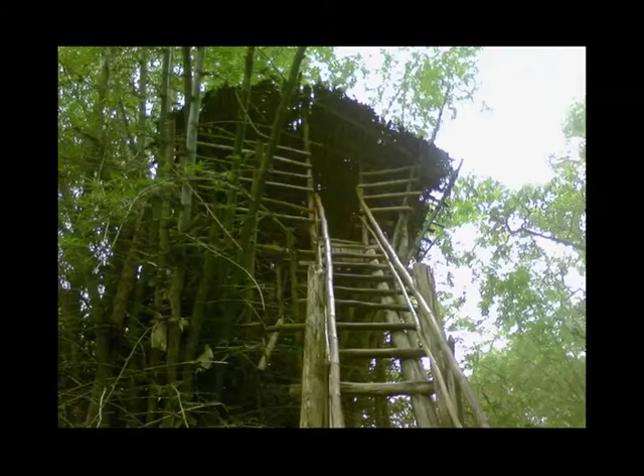I'll start with the question: which of these buildings are the greenest? I've got a series of huts, all made with very local materials, using very little energy because generally they have very little heating, if any. They've been made with local staff, so I think they're relatively green buildings. Then I've got a series of buildings designed by my boss. These are skyscrapers, bioclimatic buildings, very well shaded, very well lit, and they use little energy.

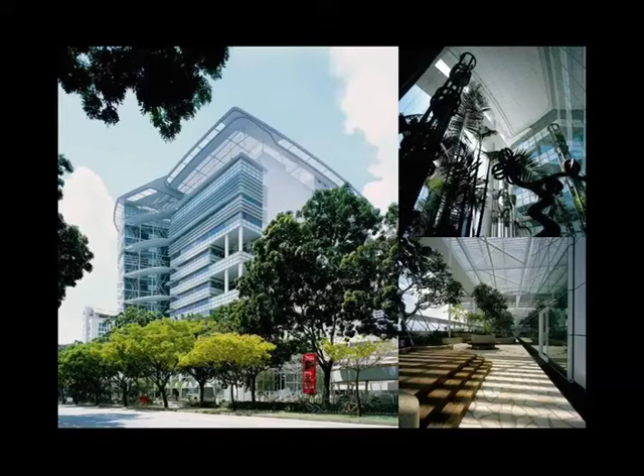So does anyone know which one of these buildings is the greenest? No? Well, it's the huts. And the reason why it's the huts is, well, partly, of course, they use very little materials. It's only local materials, but also there's very little heating, ventilation, and air conditioning in them.

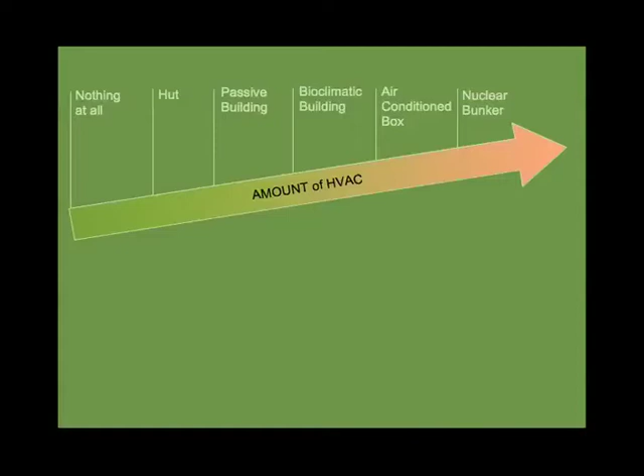So if you go from this scale, from the left to the right-hand side, on the left you've got nothing at all. So imagine maybe in Thailand on the beach and there's no building. Then we've got the hut through the passive building. The passive building doesn't have any heating or cooling.

The bioclimatic building, which I believe is the next step, is a building which is air-conditioned and which has heating and ventilation, but which is made in a way which is going to reduce its own energy use. The next step is the air-conditioned box, which a lot of buildings in Dubai currently are being built like. And finally, we have the nuclear bunker, which has probably the most amount of heating, air conditioning that you can ever imagine.

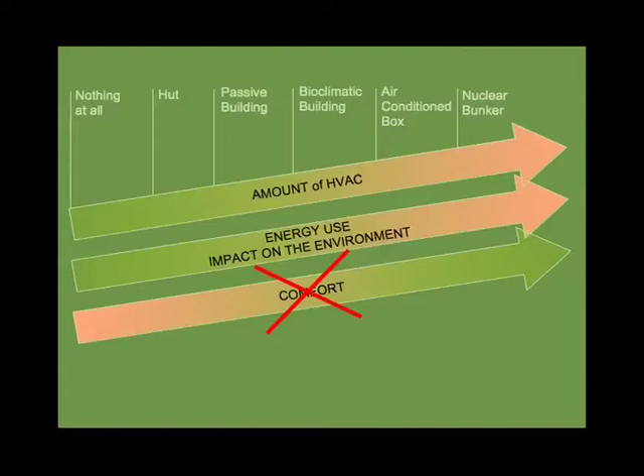So the more you go towards the right, the more energy use you get. But one could say, well, if you get more energy use and better ventilation, etc., then it should be more comfortable. We think that's not the case, because if you're in a bunker or in a glass box, then you're probably not so comfortable. We think that actually the best comfort zone is the area where you have a sort of relationship with the outside, and is a building which actually reacts with the outside.

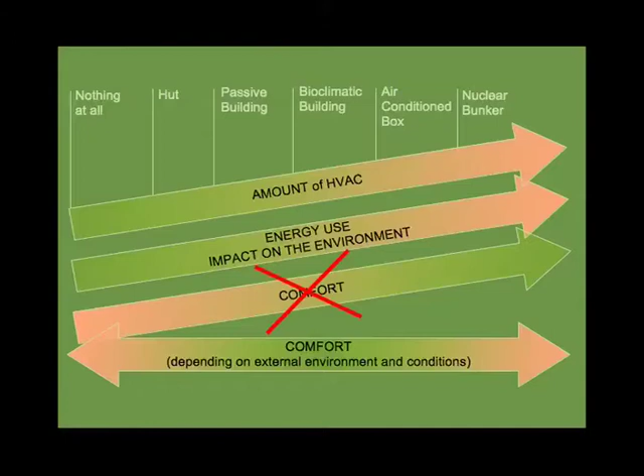So I think we're not only talking about energy saving once designing a bioclimatic building, we're also talking about buildings which are comfortable, which are healthy, and good for the occupants, therefore more valuable. So now we're going to go through the principles of bioclimatic design, and then Maria is going to present on this.

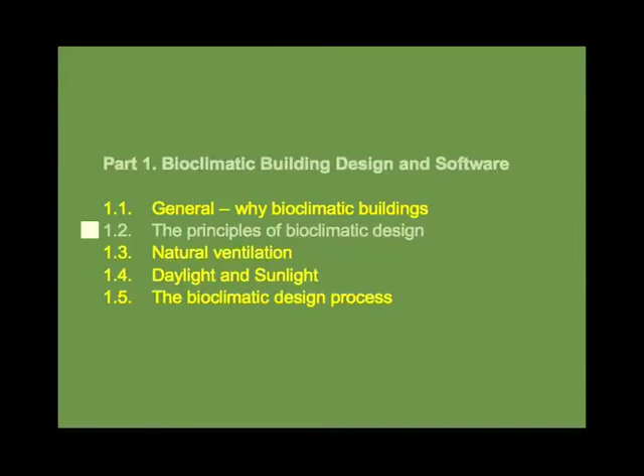One of the things that the presentation begins with is the definition of bioclimatic design. You will allow me to sit, please. Right.

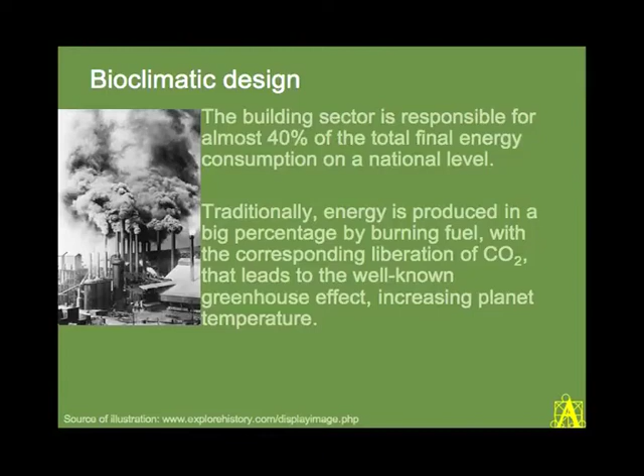What is a bioclimatic building? And why do we deal with them? One of the reasons is that the building sector is responsible for almost 40% of the total energy consumption on a national level. And energy is produced by burning fuel, and you can see the image, which is rather horrid. The corresponding liberation of CO2 leads to the greenhouse effect.

We begin with two definitions of bioclimatic architecture. It is a way of designing buildings and manipulating the environment within buildings by working with natural forces around the building, using them, actually. That's from the Manchester School of Architecture. Architecture that designs to take advantage of climate and environmental conditions is another definition that I really liked. And what is very interesting in mostly all building-concerned technologies and systems is that we don't really discover them now.

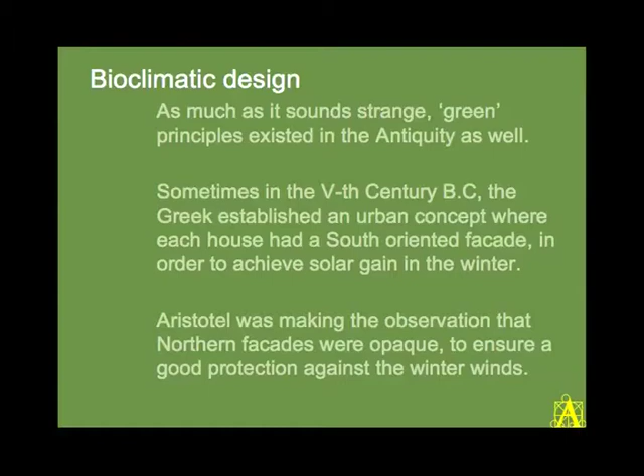But actually, we rediscover them now because in antiquity they were existing. The Greeks had their houses oriented towards south. Socrates lived in a solar house. Aeschylus said that you have to be stupid to live underground. Well, actually, we can have a discussion here because underground buildings are very comfortable and very modern today in many respects.

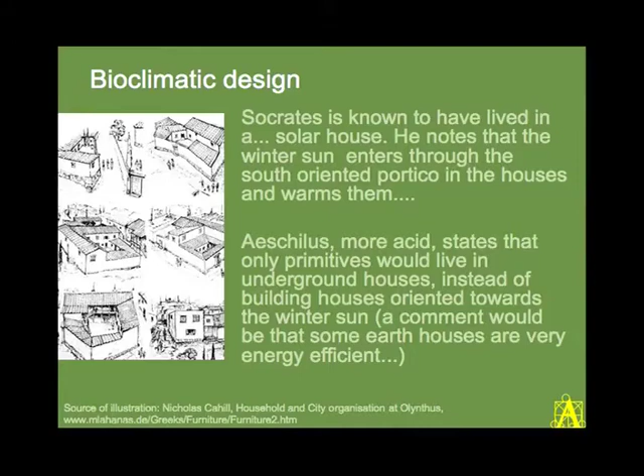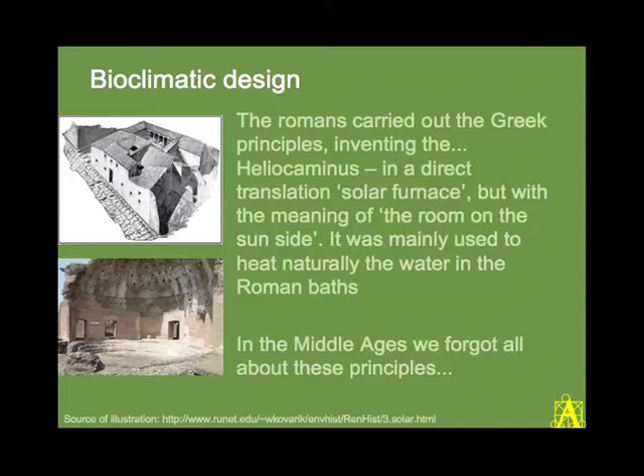Going a little bit further, the Romans carried out the Greek principles with the heliocaminus. The direct translation would be a solar furnace. Actually, they were heating their water for the baths. We forgot about these principles in the Middle Ages and reinvented them in the previous few decades.

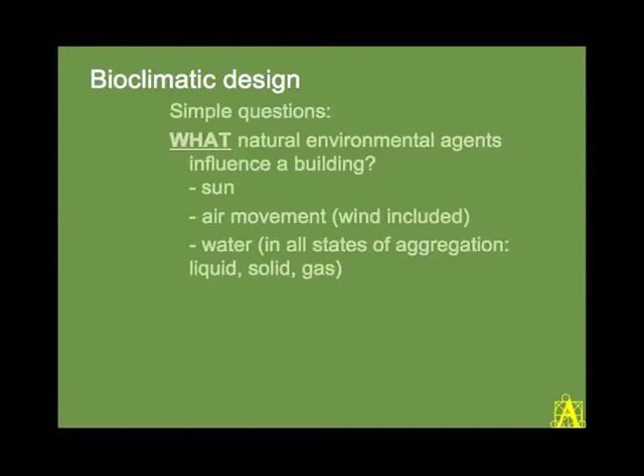So what natural environmental agents influence a building from the bioclimatic point of view, of course? Sun, air movement with the wind, water in all states of aggregation—liquid, solid, and gas. We have to build using them and helping ourselves with the benefits that these environmental agents bring us. Also, vegetation, plants and animals help us.

So you have all these presentations within your folders, so I can gallop through the presentations because it's a very dense day. Sun, air movement, water, and biological agents, I said, with their advantages and disadvantages: health, hygiene, natural ventilation, which again means health, natural cooling, which again means health.

Health brought to us from the plants, and in all the first three situations, we help ourselves to the natural energy that can be produced by using these agents.

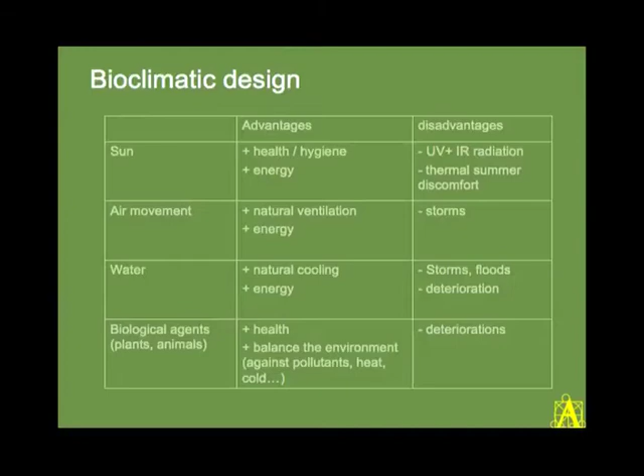And of course, the disadvantages, because we have thermal discomfort, storms, floods, and deteriorations in all cases of misuse of these agents. So sun, air, movement, currents and winds, water, landscape, vegetation all determine the location, the orientation, and the geometry of the building. The building's position, orientation, and geometry should be determined by these agents, using them for us and not against us.

Architecture has an influence over the energetic performance of the building. The geometry of the building and of the envelope, and the building materials and structures, determine the thermal behavior of the building.

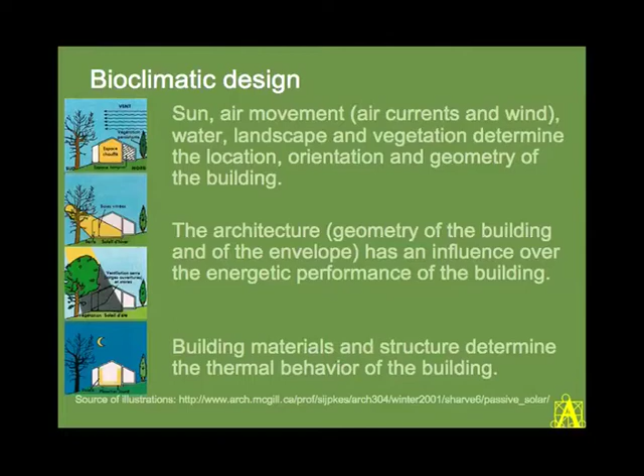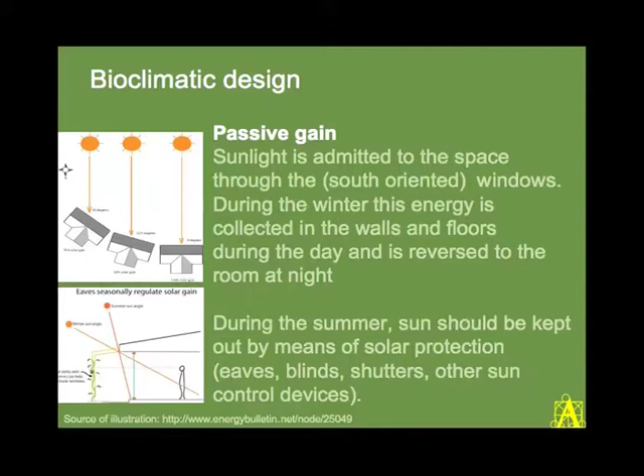During the summer, sun should be kept out by means of solar protection, and in a very, very simple way, by just drawing the two rays that represent the winter sun angle and the summer sun angle, you can actually design in a most simple way the solar protection for the summer dimension and the possibility of entering the sun during the winter.

And of course, I couldn't resist the temptation of showing that vernacular architecture, and from there civilian architecture, Romanian architecture - because we have this workshop here - has always used, and not only Romanian architecture, all vernacular architecture uses principles of bioclimatic design, because they had to build with nature, not against it.

The use of passive systems is the most efficient way of taking advantage of natural resources. Technology uses sunlight to provide renewable energy, and the way the technology works in stages you can find in the slides.

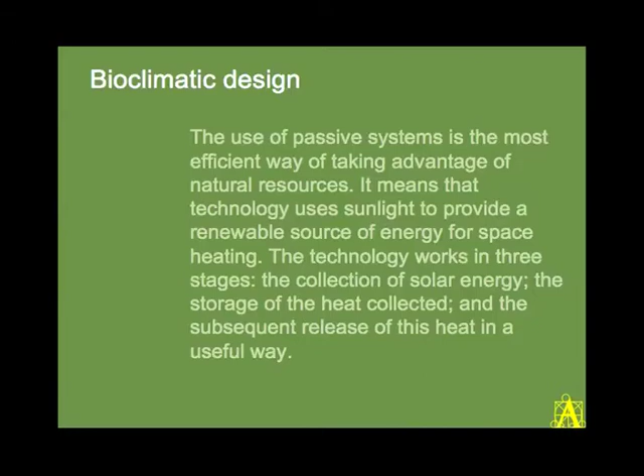Not exactly bioclimatic design, but I did say that we use water power, solar power, and wind power in order to produce power, and we can see them here in the slides in the traditional and in the contemporary way.

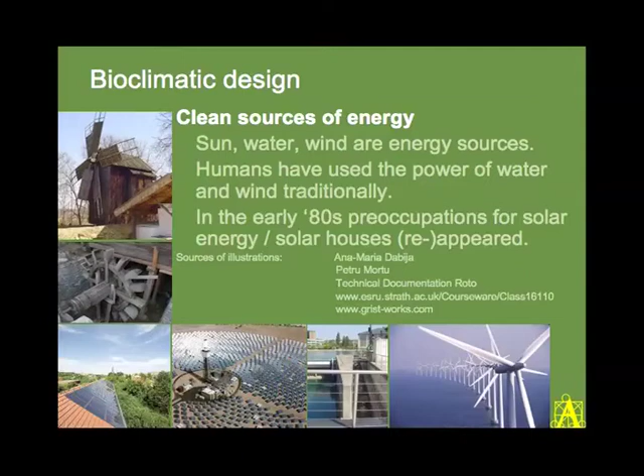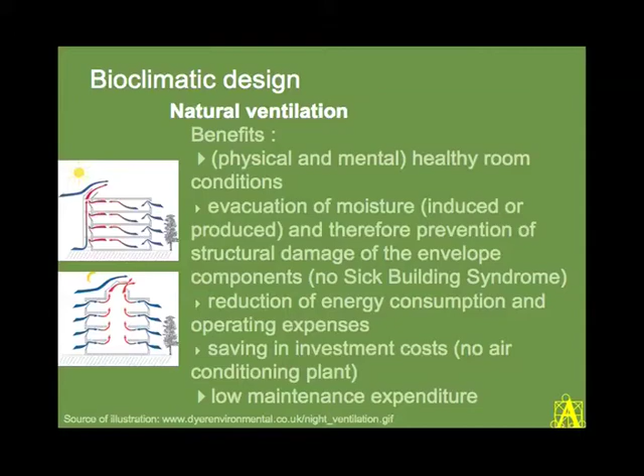About natural ventilation, the benefits are physical, mental, and more about natural ventilation will be presented. So this slide is just a flavor of something that's going to come a little bit later.

But building with vegetation brings a lot of benefits: it shields the house from noise, reduces energy consumption by shading the house, as I mentioned before, cools and humidifies and filters the air, and provides an attractive and relaxing area. I would very much like to have a coffee on that first slide, location.

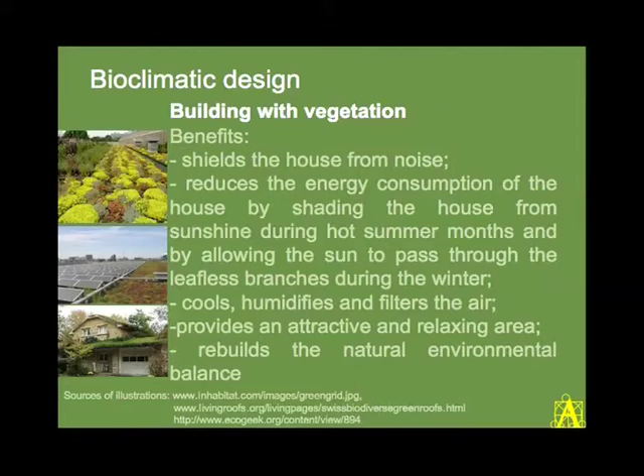It rebuilds the natural environmental balance, logically, because it brings back the plants and the small animals that were in that environment.

Bioclimatic design takes into account local climate and includes the following principles: heat protection of the buildings in winter as well as in summer by adequate insulation, air tightness, shading systems, colors, and reflections.

It removes the heat which accumulates in summer by passive cooling and natural ventilation, and uses solar energy for heating buildings in the winter season and for daylighting through orientation, space layout, and passive solar systems.

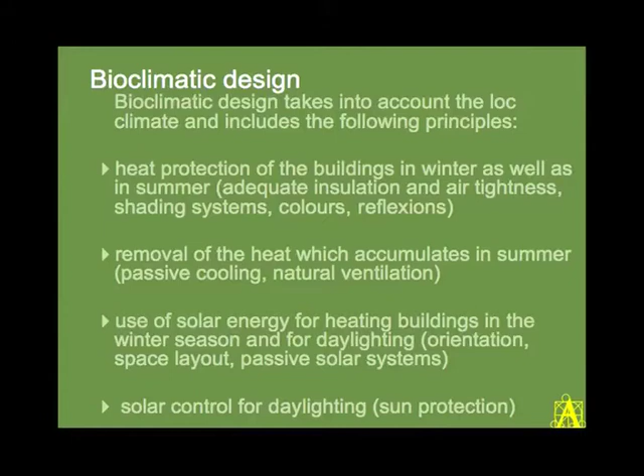Solar control for daylighting and solar protection. The use of local building materials, which is very important, as well as recycled or recyclable materials whenever possible. The use of local vegetation in order to preserve or restore the local natural environment by diminishing pollutants and CO2 emissions.

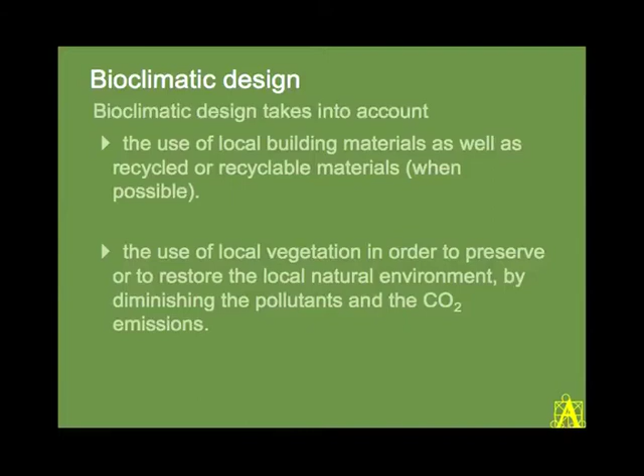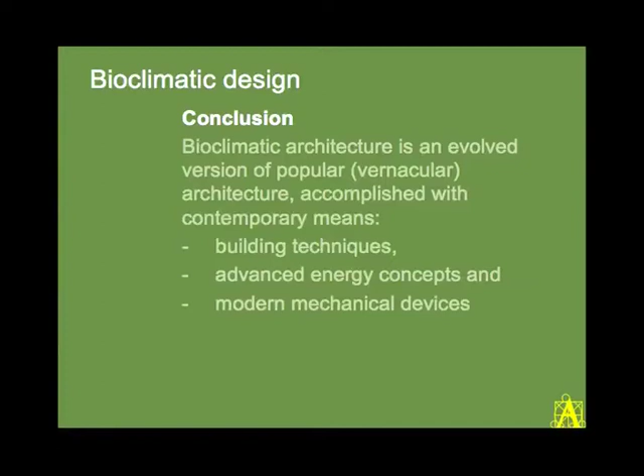So in conclusion, bioclimatic architecture is an evolved version of popular architecture, vernacular architecture, accomplished with contemporary means - which means building techniques, advanced energy concepts, and modern mechanical devices. This is a scheme, and thank you.

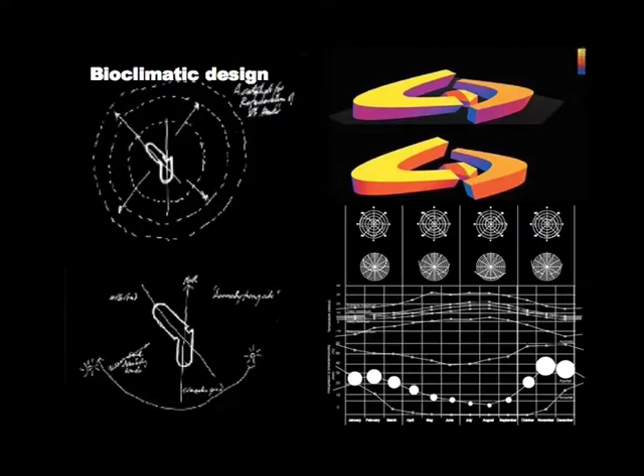Then we do some shape studies, some form studies. The final thing that happens, we might do a bit of simulation of, say, how much sun we get on different parts of the facade, or how much wind arrives on the facade, to understand in more detail how our building behaves. That happens last—the first thing we do is look at the climate locally.

But maybe you want to know about wind direction and temperature at certain times of day to evaluate whether external areas could be comfortable, and to see whether you can make some external areas comfortable at certain times of the year—not all year, just certain times.

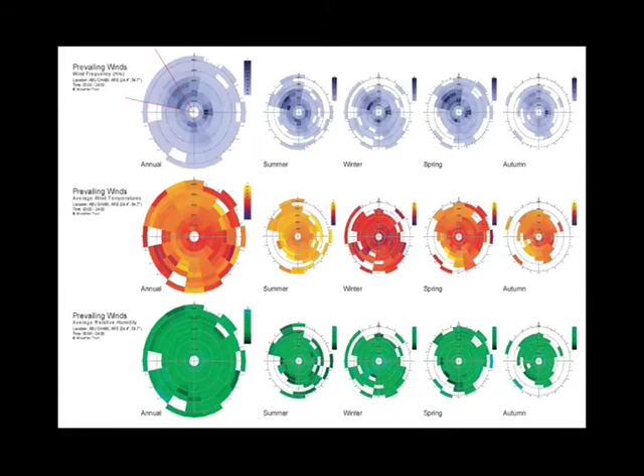It's very different in the UK, for example. The one at the bottom here looks at relative humidity and wind direction. In many places you may have, for example, northern winds being colder, and you might want to take advantage of that to make sure your building catches that cold wind when it's too hot.

These are further studies, all done with software called Ecotect—that's the one we use in our office. You might want to investigate other tools; it doesn't really matter what you use. I quite like Ecotect because I think it's a fairly complete tool—it does everything I needed at the early stages of a project.

The little graph on top—let me use this. This graph looks at the amount of solar radiation, how much solar energy we get in different orientations. For example, the red lines would be summer and this would be winter. I believe, though I haven't checked, this is on the other hemisphere, the other side of the planet. But the point is you can look at, for example, the optimum orientation of a facade.

What is the best orientation in this area? So that probably would be towards the north here, because we're on the other side of the planet, because you have the highest solar gain in winter and the lowest in summer. So these kind of little studies are really, really important, because this is what will form our building. This is what helps us to form our building.

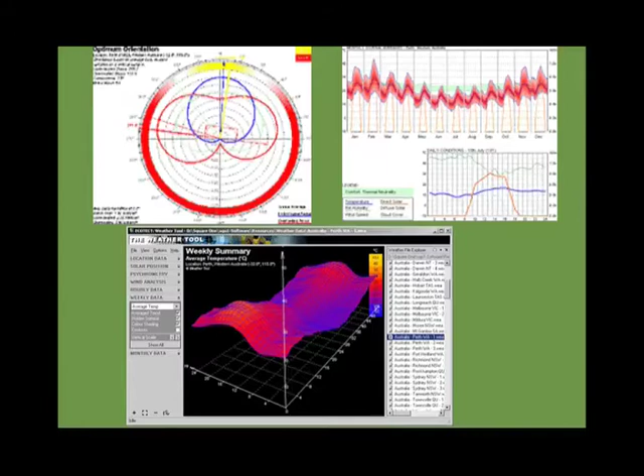If I'm going too slowly, please look really bored or do something that indicates that you know all of it.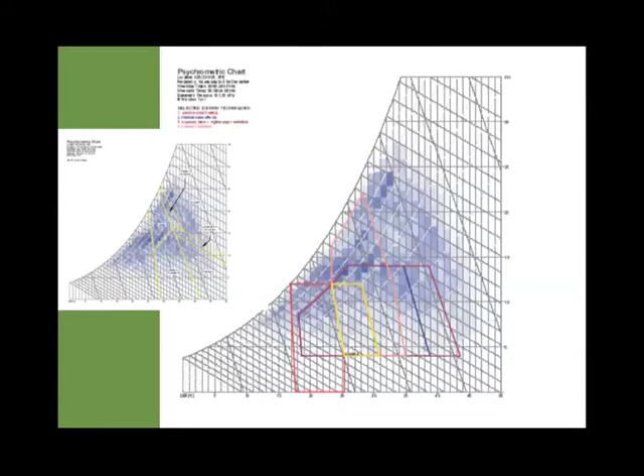So to be able to get climate information, there's a variety of sources.

The software, well, many of the software that we're using, and this is just a few of them, I don't want to do advertisement. If you investigate, you will find there's a lot of other types of software that can be used, but the software that you can use to do building analysis always tends to have climate data, climate information. It might not have climate for the area which you want to study, and if that's the case, you need to go to the Department of Energy website, the American website, which has an unbelievable amount of information on climate, and it has all sorts of climate files that you can download for all around the world, really.

Then there's another software which is called Meteonorm. Meteonorm is very useful. The software itself is geared to do climate analysis, so that's the only use of the software. What it does is that it has a database of information on climate data for different areas around the world.

But if it doesn't have certain information about a certain area, it kind of averages the areas around it, which you've got to be very, very careful about, because of course, if you're looking at wind data and you have a large mountain near your site, you don't really want average information between two different sites. What you want is the specific location which you're studying. So I think Meteonorm is a fantastic software, but it's important to be quite careful.

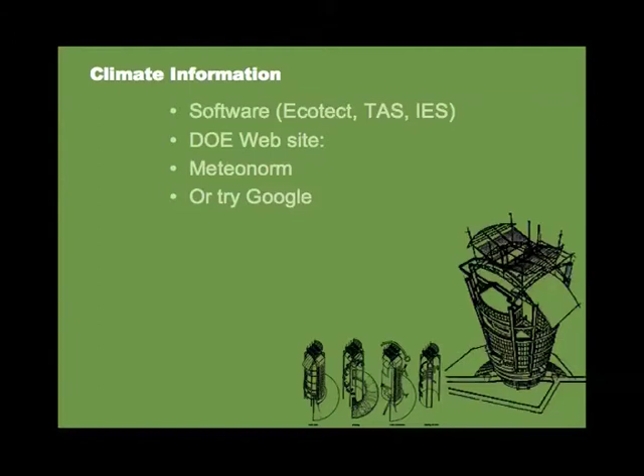And the last source of information on climate is Google. I use Google a lot. Even if you don't have a full data file with hourly data for your area, you can get on the touristic website, and you get a good first idea of the kind of temperature and humidity you get. It's very useful. There's also very often information about local particularities, like local winds that may exist. For example, we have some very interesting winds occurring in the Middle East, and I found out about that on Google. So Google is a very good source of information, I think, or any search engine.

So this is my health warning when dealing with climate analysis. It's important to check the source of the climate data. It's very important to know where the information comes from and whether it's a reliable source. The second thing is it's important to be very careful about wind data, especially if you're using any kind of software which is going to average the two locations around it and calculate wind data from it, because that means that your wind information might be really wrong.

The other thing is that it's important to understand what kind of climate information we're dealing with. Oops, this is not going well. Sorry. If you take a data file, it's going to have hourly information on climate. But it could be for an average year, or it could be for a very hot year. So there's different types of file. I think it's very important to be aware of what kind of information we're dealing with.

If you have background information that tells you that it's an especially hot summer year, which some information is actually taken for that purpose, then it might be safe information to use if you want to design for summer natural ventilation. If you have an average year, then maybe that's a good climate for evaluating energy use of your buildings. So I'm stepping ahead, because what I'm telling you is that climate files can be used for other purposes than just looking at the preliminary design before designing your building. But a little bit later, we'll go through other uses that you will find of climate information.

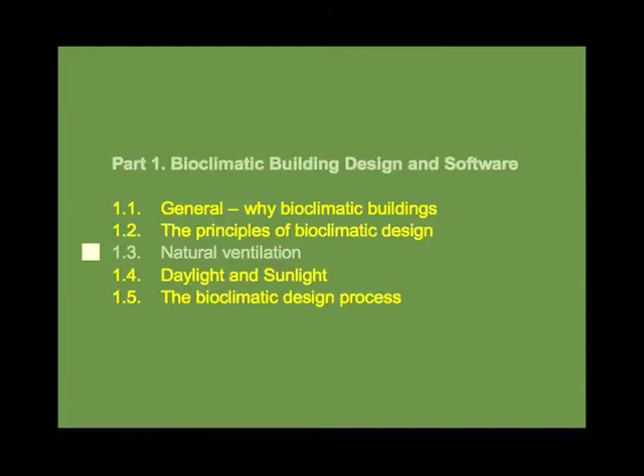So this is slightly separate. I'll talk through the design of naturally ventilated buildings and natural ventilation. So why natural ventilation? Why ventilation? Obviously it's to get fresh air, to remove smells and pollutants, and to cool down buildings. This presentation is going to be a little bit long.

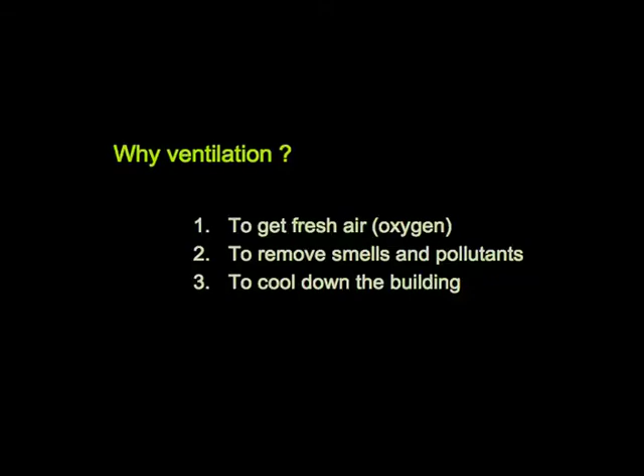I think Anna Maria went through that a little bit earlier, but the advantages of natural ventilation are, of course, that it's low energy. It's a very simple system. What is simpler than just opening a window? It tends to be cheap, although if you start having very complicated controls to automatically regulate the opening and closing of your windows, then suddenly it gets quite expensive.

It tends to be low maintenance. Again, if you start having automated controls controlling the opening and closing of windows, then it can get a little bit high maintenance. And it's quite healthy. It's really healthy to have direct contact with the outside air.

The disadvantage is that it's not so reliable. From the point of view of an M&E designer, of a building services designer, it's not a very comfortable thing to be telling your client that your building is going to have a variable temperature inside. And it's difficult to guarantee that high temperatures are not going to occur very often. I think it's a very high risk because you don't know exactly what the outside temperatures are going to be in the next 5 years, say.

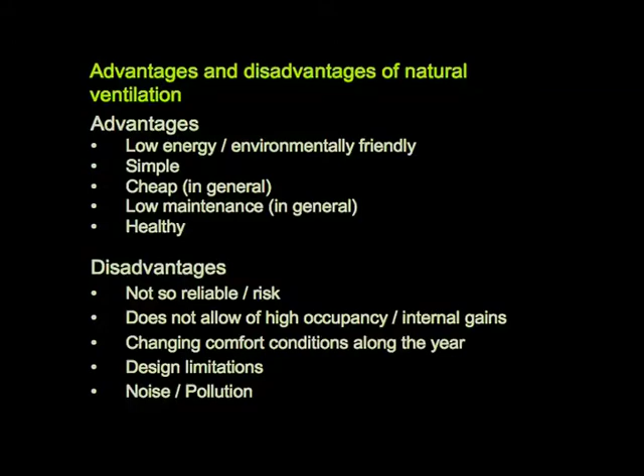And of course, noise and pollution. If you open the window to the outside, you're going to be more affected by noise and pollution directly outside your window. It's quite obvious. Although, again, there are ways to deal with that. There are certain systems that can be used to prevent noise and pollution from getting inside.

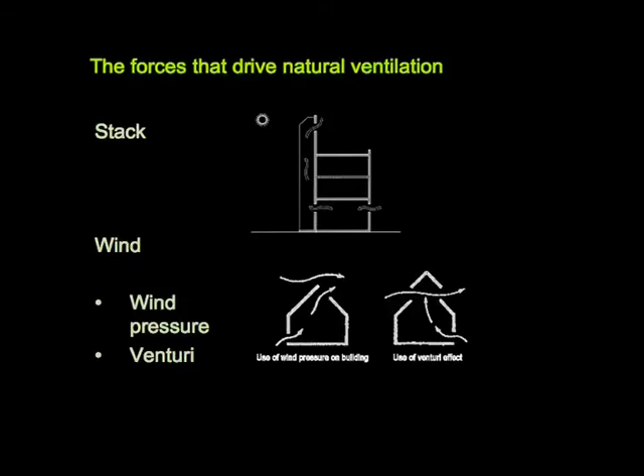So I'm going to go through the main types of natural ventilation, and this is very simplified. Really, there are two different forces that drive natural ventilation. There's stack, which is heat-driven, and then there's wind. And there are two ways to get the wind. There's directly through wind pressure, so the wind gets straight into the building, and the other effect is through venturi, where there's a suction effect which is used to drive the ventilation. So these are the main types of natural ventilation. There are variations, and there are systems that use two of them together, or even all three.

So the most simple way to naturally ventilate a building is through single-sided, just a window on the side of the building. Then the more effective way is to have a window at the bottom and at the top, because then you're taking advantage also of the stack, of the difference in air pressure due to the temperature.

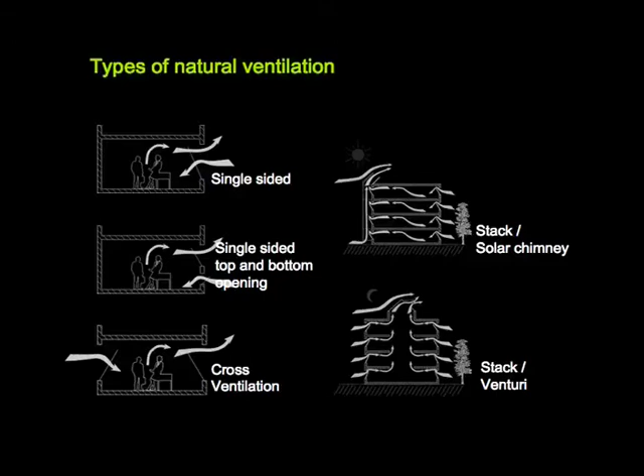Then cross-ventilation, and then you can start having more complex systems with, for example, a mix of stack with a solar chimney, which is a chimney with a glass front, maybe. And then you can use internal atria kind of shapes, which use both. It actually uses stack, venturi, and a little bit wind pressure.

The problem about solar chimneys is that if the surface of the glass is really cold, then what happens is that the air actually falls because it gets cooled and it falls inside the solar chimney. So the chimney sometimes doesn't work so well. So very often these solar chimneys need a fan, which means that it's not quite natural ventilation anymore, so they're cheating. But it is possible to design them properly to make them work.

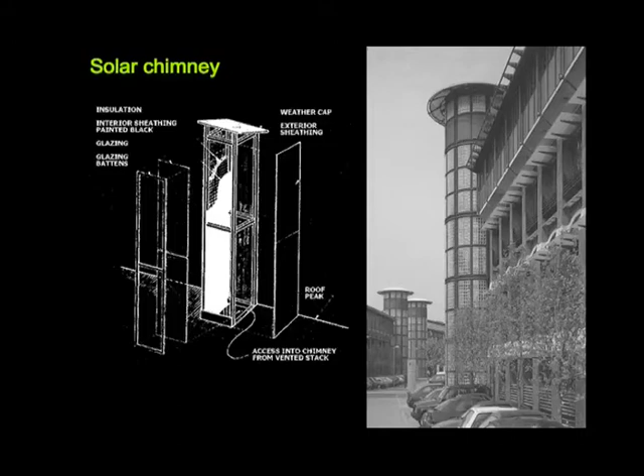But to be able to make them work, I think it's very important to be doing a full simulation, or to be doing proper testing, to be able to understand whether the system is going to work. So generally, what's used is a CFD, computational fluid dynamics simulation, which I'll explain a little bit more later, to see if that kind of system works.

Wind catcher, this is in the Middle East. Wind catchers are not very new technologies, they've been used for centuries, as you can see. The general idea is that you have a sort of, I've done it again. Oh, yeah. It's like a chimney form, but it catches the wind, basically. It's got 4 different walls inside it. It can be any other shape, and the wind is caught and just falls inside the building.

The good thing is that the wind can come from any direction and it still works. On the other side, say if the wind comes from this side, the air goes out from the other side, partly through the venturi effect. So it's a system that works extremely well. Sometimes it's combined with water spraying, or a body of water, to cool down the air further.

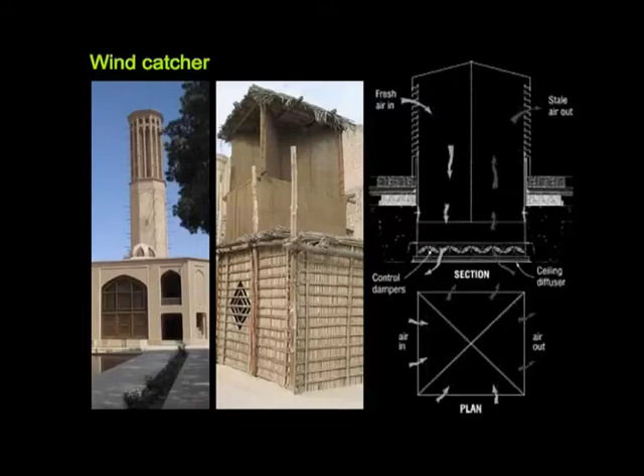So yeah, this kind of system works extremely well. Many are still in operation, and it's perfectly reasonable to do modern versions of these systems. This is a very ugly picture, but what it's looking at is wings which catch the wind. So really, when you open your window, if the wind comes from this direction, it catches the wind, and the wind comes in from the outside.

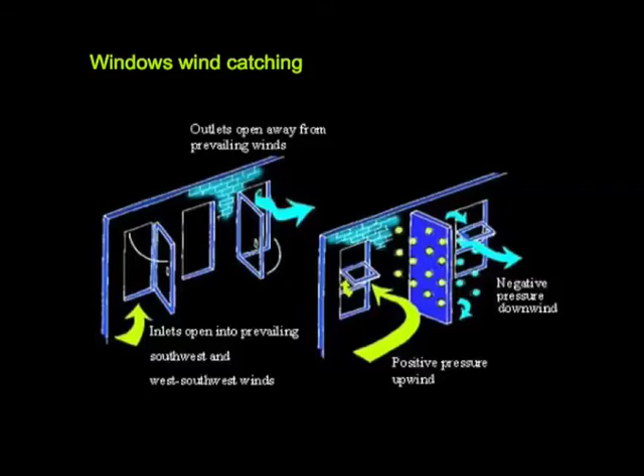It's a very simple system, but if your wind consistently comes from the side of the building as opposed to straight in front of it, you can build these little wings that are going to catch the wind and enhance the natural ventilation inside your building. But to be able to do that, and to know whether that's necessary, it's important to know where the wind comes from, which is why your climate analysis was so necessary.

So now I'm going to go through some rules for designing naturally ventilated buildings.

As I was saying earlier, the problem while designing naturally ventilated buildings is the internal loads inside the building, the amount of energy inside it. It's important to make sure that if there are important internal gains, like a printer room, you might want to isolate that room and have it air conditioned in a corner, so the heat doesn't come inside the rest of the building. This is just an example, but it's very much part of how a naturally ventilated building is designed: the different rooms and users are separated not just through their function, but through their thermal behavior, how much heat gains you have inside them.

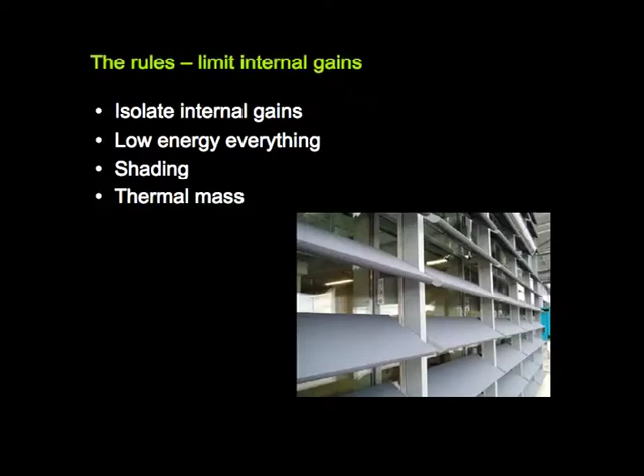The shading system is also very important, especially on the west and east facades. And the thermal mass inside the building should be kept to a maximum, especially if you're ventilating at night.

These are the different types of windows. When designing windows, it's very often true that a designer will design a naturally ventilated building, and then the architect comes around and says, well, my window is actually a type like this. So the area of opening you're going to have is about half of the area of the window. When designing a naturally ventilated building, it's important to keep in mind what the window is going to be like, because if you need a certain area of window opening, that's not the area of the window, that's the area of the open bit of the window.

Even though there are actually some other coefficients that should apply, I think it's a very silly thing, but it's how many naturally ventilated buildings fail, because this little detail is forgotten about.

Another thing is, if the building is ventilated at night to cool it down, the opening of the window needs to be thought about very carefully, because there might be some safety issues, so people don't do silly things like throwing themselves outside the windows.

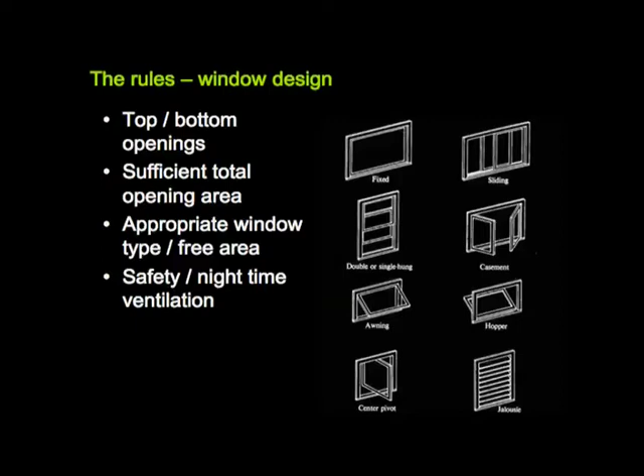This is really what thermal mass does inside a naturally ventilated building. If you look, let's imagine the blue line is external temperature, so it varies, hot during the day, cold during the night. You have all the hard surfaces inside the building that collect the cold from outside and temper, with a certain delay, the temperature from the outside. So it basically brings your temperature to the comfort range.

Sorry, I just forgot something. To be able to get this effect, you need to avoid carpets and false ceilings, because that's going to cover the thermal mass and your building is not going to cool down as effectively.

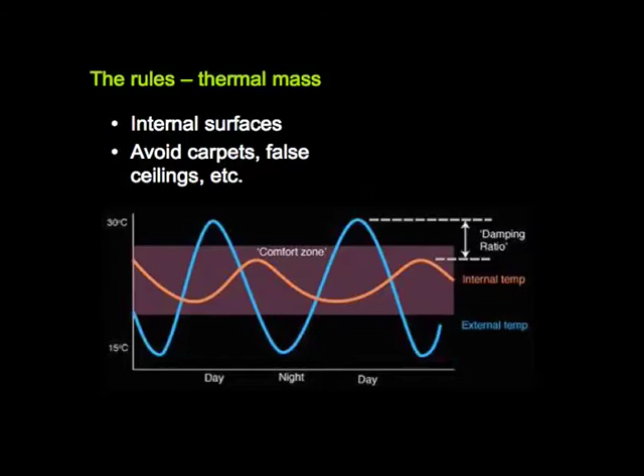These are the kind of guidelines that we use. These are UK guidelines, though I know they're being used in the States as well. I don't know if you have any equivalent rule of thumb that you use when designing naturally ventilated buildings.

What we use is that if your building is side ventilated, with just one window, then the width of the room you're ventilating shouldn't be any deeper than twice the height from the floor to the ceiling.

If you have a top and bottom opening, then the ventilation is more effective. Then the width shouldn't be any more than 2.5 times the height. And if you have two side ventilation, one window on each side of your room, then the width shouldn't be any more than 5 times the height. So these rules basically govern the form of naturally ventilated buildings.

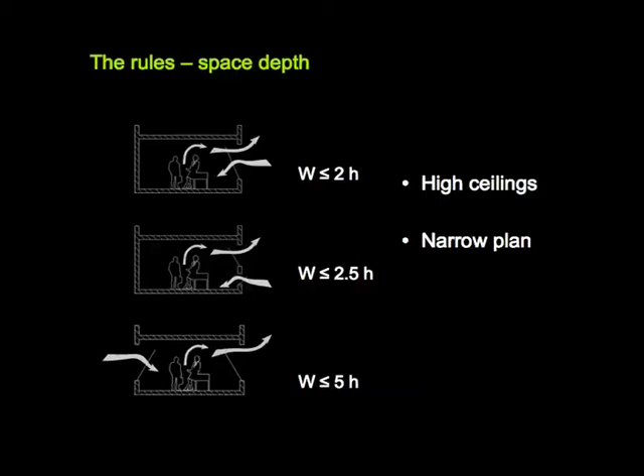What's important to notice here is that the higher ceilings you have, the better, and it also makes a very nice feeling to the room. But the higher your ceilings, the more the natural ventilation is going to function. The other thing is that you're going to end up with quite narrow plans, which is why in Germany many office buildings have narrow plans, so that you can allow for good daylight and good natural ventilation.

Wind-driven natural ventilation is slightly different at high levels and at the bottom of the building. If you have a high-rise building, you're going to get a lot more air through wind-driven ventilation at the top than you get at the bottom. It's quite obvious, but in theory, if you have a naturally ventilated building, it should result in smaller windows at the top than at the bottom.

The thing is, very often buildings are not designed for wind-driven ventilation. They're designed for a ventilation which is only driven by stack, by temperature difference. And we do that because it's a safe thing to be doing.

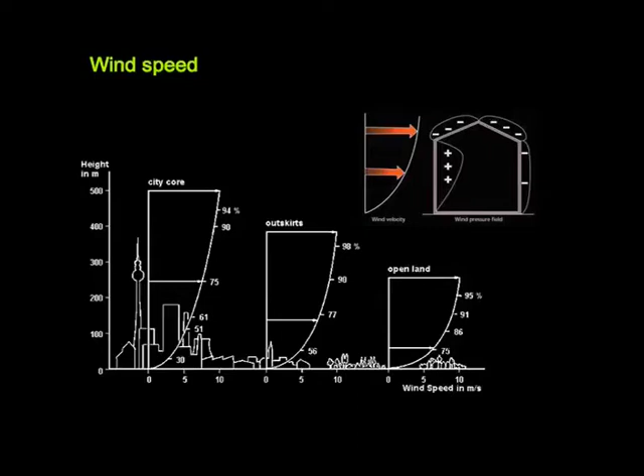Another important thing is that the wind speeds are going to be very different in cities than they are in open land. You get more wind at the bottom in open land than you get in cities. The wind is very slow down at the bottom in cities. And that's quite useful to know as well when you design wind turbines.

So these are some of the equations that govern the design of naturally ventilated buildings. There are two ways to go about it, three things to do. The first thing is to use the rules of thumb I was mentioning earlier about the width of the building. The second thing you might need to do is a hand calculation using these formulas.

There's a calculation method in a document which I think you have reference of, a UK document called AM10. I think it's called Design for Naturally Ventilated Buildings or something like that. Through these equations, it's possible to evaluate the required size of your windows, depending on the heat gains inside the building.

So they're very simple equations. I mean, they look complicated like that, but once you've done it, it's okay. They will give a first-hand idea of how big your windows need to be and what kind of heat gains you can cope with inside the building. Very often, I don't know how it's here, but in the UK, very often people don't do that—they go straight into doing simulations.

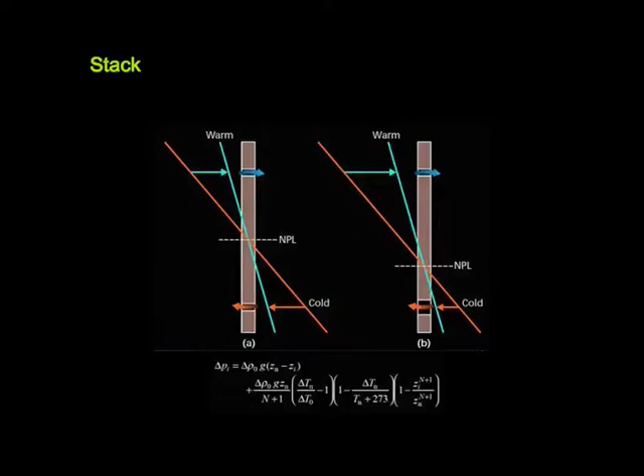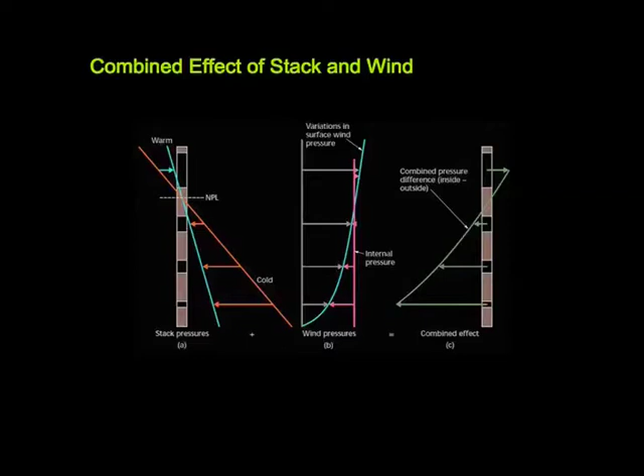I won't go through this too much, but the general idea is that there is a kind of neutral pressure point that occurs, and through evaluating the pressure differences from top to bottom at different levels of your facade, through both stack and the use of wind pressures, you can evaluate the air movement and air quantity you can have inside your room.

So I'll go a little bit through some important design thoughts. Here we've got a building which is naturally ventilated through an atrium, using stack here and a little bit of venturi effect. So if the wind comes from here, we're going to get high pressure here, negative pressure here.

The thing is that many buildings are being designed like that, but it's important to be aware that if the wind is very strong, then what might happen is that actually you don't really get what you want—you get air coming straight through your building. And that only happens if the wind is strong.

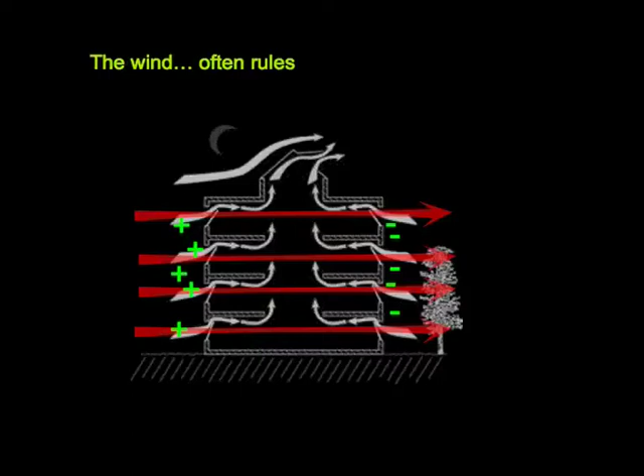Now, I don't think that this is a problem, actually, because without the wind and with the stack effect alone, it's a kind of worst-case scenario. It doesn't really matter so much if at some times the building doesn't function the way you want it to. But it's important to be aware of it, because you might want a different closing and opening window regime, and in terms of how you simulate the building, you might need to think slightly differently. This is another case.

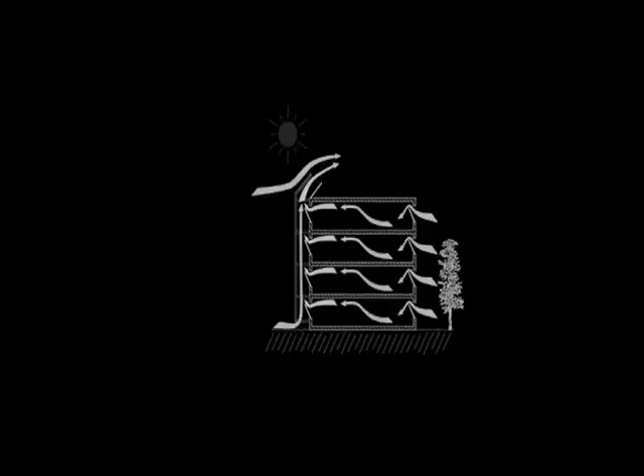So I'm sure you can get what's going to happen now. The wind comes from here—what's happening?

Well, you get a positive pressure on here and a negative pressure on this side. And it might be that some air gets through the wrong direction and it's harder for the wind to get up there. This is a bit more of a problem because it can actually prevent your building from functioning.

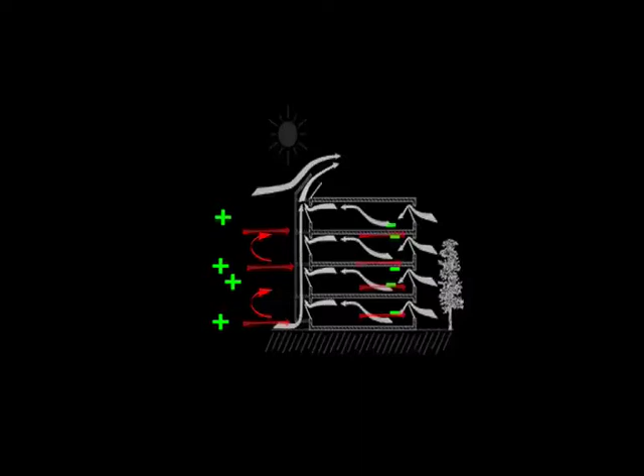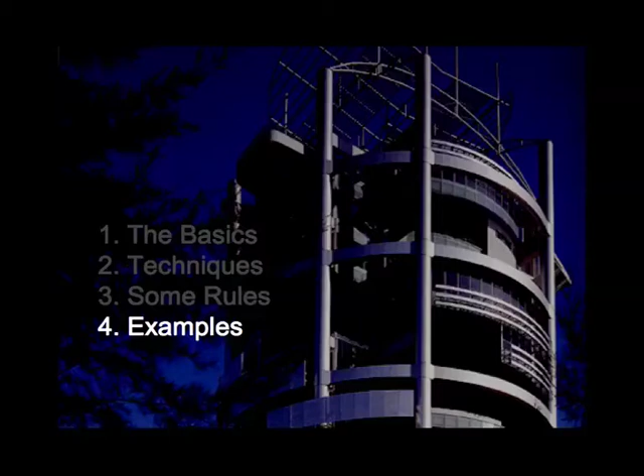So I'm going to go through some examples of buildings, some of which I've been working on, some of which we haven't been working on. This is a building that Ken Yeang has designed.

It's a bioclimatic building. It's got a completely different shading system on different facades of the building. Sorry, I should have said this is in Malaysia, in Kuala Lumpur. And he also has, what's interesting, natural ventilation inside it. Now, it's quite a famous building for its natural ventilation, but being in Kuala Lumpur, you would imagine that natural ventilation is only limited to certain types of space. So this building has mainly the core and functional areas naturally ventilated, while all the office areas are generally air-conditioned most of the time.

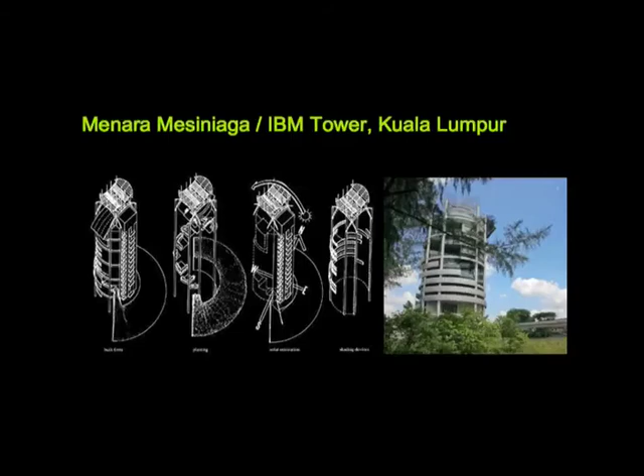I don't think that's a problem. I think it's a very good thing to have some of the areas that are naturally ventilated and some which are not. You just do what you need in the areas which can accept it. You put natural ventilation in areas that can accept natural ventilation. It's not necessary to have the whole building ventilated that way. So cores, staircases, etc. don't need air conditioning all the time, so it's possible to do that.

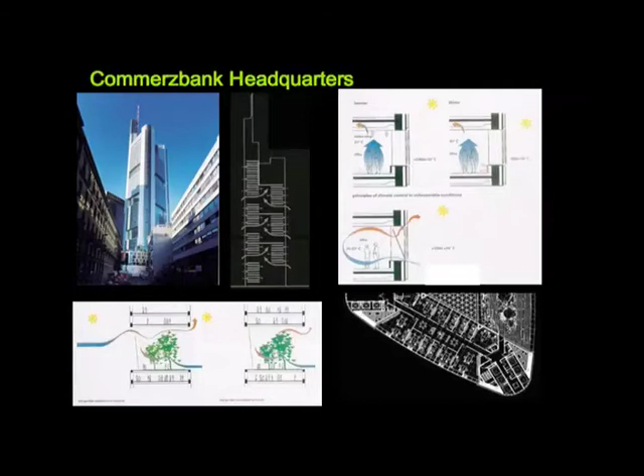This is a relatively famous building, which I'm sure you've heard of. This is a not so complex system of natural ventilation here. What's I think quite interesting here is that there are internal gardens, which are also naturally ventilated. And one thing which I should mention is, if you look, despite the quite deep internal spaces here, the actual depth is not so much.

This is a rather famous naturally ventilated building. I'm not sure about this one, I want to visit it as well. I've got a problem with it because it gives a bad name to naturally ventilated buildings in the UK. Architects in the UK don't like the look of it, they don't like the way it looks, and so very often they criticize naturally ventilated buildings as being ugly using this example. So I don't know whether it's ugly or not - that's not my job, I'm an engineer, I don't deal with architecture. But in any case, I know it's been given quite a dodgy reputation.

The problem with that building is that they wanted a deep plan building - they couldn't design with the limitations I was mentioning earlier. So the depth of the building was compensated through the use of extremely high stacked chimneys, which you can see here, to create a sufficient force of air being drawn from the bottom.

When you do that kind of thing, you can break the rules I was mentioning - the rule of thumb about 2 times the height for single-sided ventilation, or 5 times the height for two-sided ventilation. So if you do stuff like that, you can definitely break the rules. But to break the rules, you need to carry out quite detailed calculation exercises using both hand calculations and complex computational fluid dynamics simulations, and that's the way they've done it, because we don't instinctively know how much air is going to be drawn from one point to another.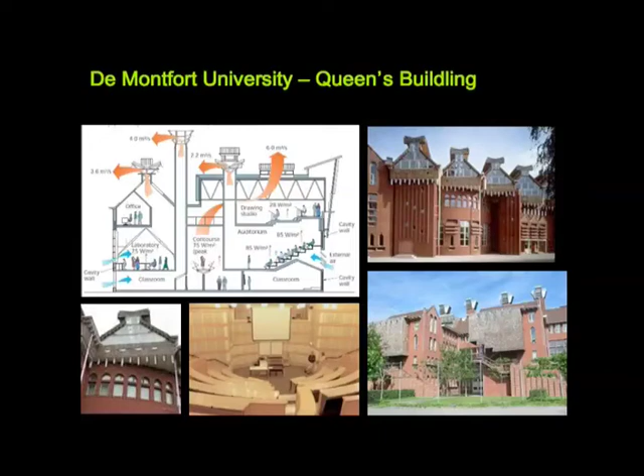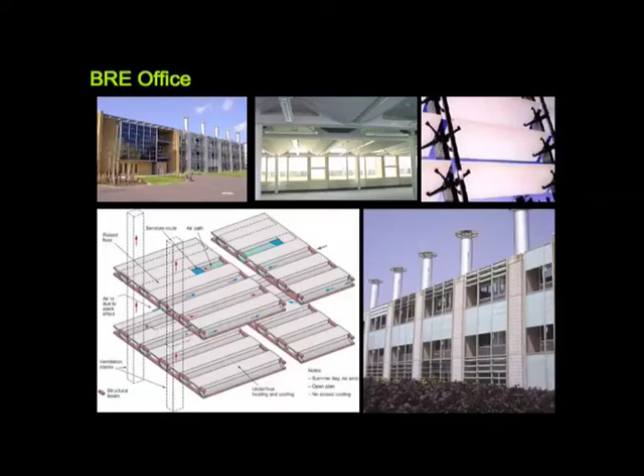And when I went there, it was working perfectly, but I don't know whether sometimes in the winter the air actually wants to go up the chimneys. It might be that it goes down. But again, this kind of function can only be checked through simulation or a little model.

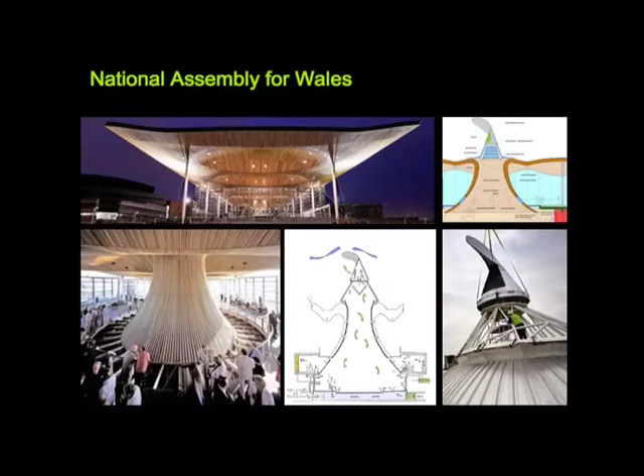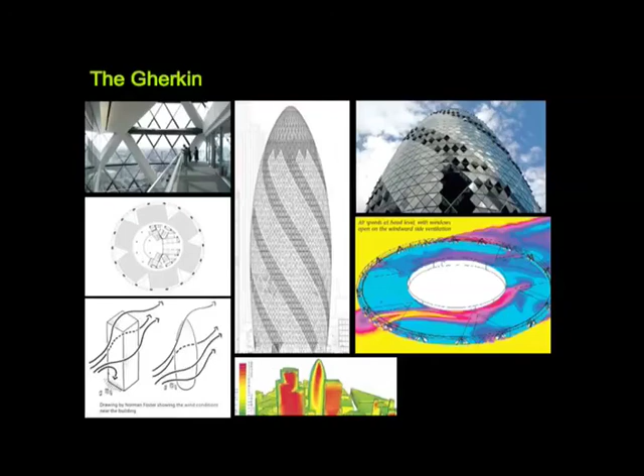Another thing which I forgot to mention, sorry, the whole swirly shape here is actually derived from the natural ventilation necessity, because the air actually swirls around to the top. That's another of the...

So I'll go a little bit through some software. I'm going quite a lot quicker than I expected, actually, so we're a little bit early on schedule.

So I'll explain a little bit what dynamic thermal simulation is. Dynamic thermal simulation is used to not only design naturally ventilated buildings, it's also used to calculate the energy use of buildings. Most large-scale buildings in the UK are designed with a dynamic thermal simulation. I think in the States it's also more and more the case, and many places around the world are starting to use this type of tool.

Now what it is, it's a simulation that uses hourly climate data. So the climate information which I was mentioning earlier, including temperature, relative humidity, wind direction, wind speeds, etc., and also solar irradiation, are being used. This information is hourly and is very detailed.

Then the other type of information that's put into the software would be a 3D model of the building. So all walls, including windows, the actual form and shape of the building, and detail on the different construction details of all the different building elements are going to be also entered with their thermal properties. So you're going to have what type of walls you have, and all the properties of the different elements within the walls. It's the same for windows. You would have the window size, because you have a 3D model, and also what type of glazing you have, what is the U value, etc.

Then you're going to enter into the software what type of opening schedule you might have for the windows. So how much do they open and when in the year? It could be that the information you enter is not when your window opens, but actually depending on what it opens. So you could tell it if the temperature is over 25 degrees centigrade, then we open the window. Or if the amount of carbon dioxide inside the building is over a certain limit, then we open the window.

Now, that means either you assume that people are going to open the windows when required, or you would have an automatic control, which is more and more the case now with modern naturally ventilated buildings. So you present these actions inside the building, and then the last thing that goes in there is the internal gain schedules. So how many people, how much heat, how much latent heat do they emit, and also the heat from lighting systems, from your computers, from anything that's inside the building.

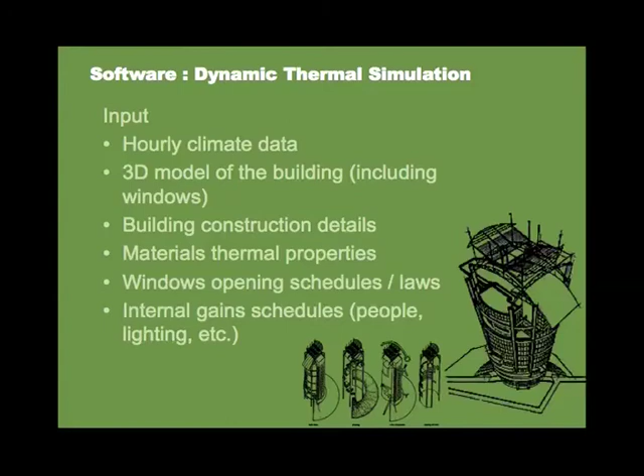So what you get out of it, you get air temperatures. You get also surface and resultant temperature, because of course the temperature that people feel is a result of the surface temperatures around them and the air temperature. We're not actually just feeling the air temperature. We feel what's called the resultant temperature. So you get all this temperature information on an hourly basis for the whole year, so you're going to get a variation of temperature all along the year.

Then you get relative humidity and airflows, the amount of air, although you've got to be quite careful about using those. Predicted mean vote, so the comfort parameters, to an extent. Very importantly, you might get your energy use. Now, there are certain exercises that you might want to do if you're using the energy use. So maybe you will need to, for example, put a limit to the size of the boiler.

In the input section, which I was mentioning earlier, I didn't go through the mechanical systems, but in certain cases, depending on what you're doing, you can also put some details about the mechanical systems or the building services systems that you might have in your building. If you do that, you can get a more accurate prediction of energy use and peak energy demand. You're going to get the variation of cooling demand and heating demand all along the year for each hour of the year. And so if you have that, maybe you can decide what your peak is.

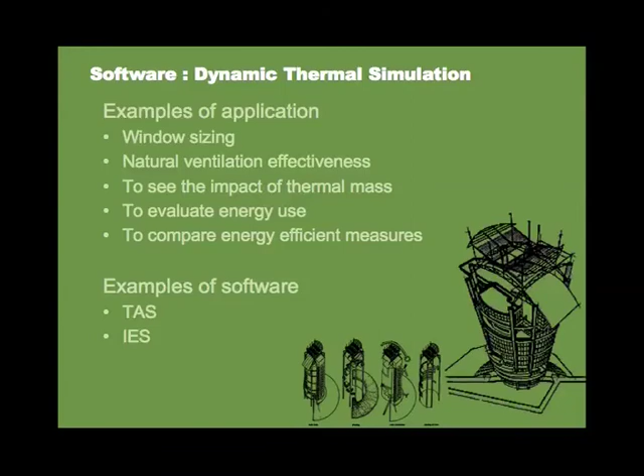Both TAS and IES and any other software of this type, dynamic thermal simulation, which is also called dynamic thermal modeling, DTS or DTM, require extensive training. I don't think anyone could just go onto the software and use it straight away. I think it needs at least a couple of days, and then to be able to use it properly, I think it takes, I'd say, a month or 2 months' experience to be able to really run with it.

And I don't think it's realistic, if you have a deadline on the design of a building for next month, to be deciding to use that. I think it's important to prepare and to take the time that's necessary to learn. Once it's learned, that's it. Once one software is learned, the good thing is that because they all function according to the same principles, you end up being able quite quickly to use the other software and design with them. But I don't think it's something that should be done in a rush. It takes a while to learn.

So the little picture on the left here is not from my own designs; this is just a completely different building. But this is showing the kind of detail that you get in the 3D simulation of the building. So if you look, you have some details of the facade, etc. This, I suspect, is going to be the variation of temperature during the year. Maybe the red bit could be the heating system, for example.

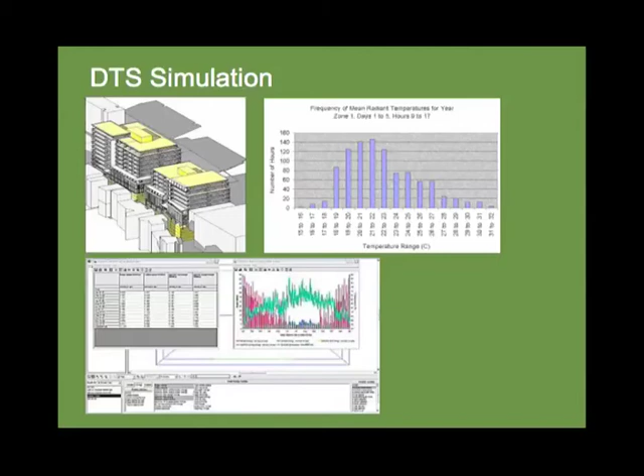As a health warning, like I was saying, it's very important that people that use this are trained properly. In my previous job, I had a team of engineers doing that kind of work, and because there were enough people to justify somebody training us specifically, we had people coming straight from the software providers to train us. It's quite expensive, but it's definitely worth it. It makes things a lot quicker in the long run, and a lot more accurate and precise.

It's important to be reviewing because there's so much very detailed information that goes into these machines. What actually takes a very long time is not putting the stuff into the machine and running the simulation. What takes a long time is making sure that what goes inside the machine is right and that there are no errors, because the machine is not going to make mistakes, but people that put the information into it make mistakes all the time. Even extremely experienced building physicists, the people doing that type of work, make mistakes all the time.

So the review regime of all the input is the most important bit. There can be a very formalized way to do that, where we have forms to fill in and people tick what has and hasn't been reviewed, but it has to be done extremely carefully and thoroughly. Otherwise, there are big problems.

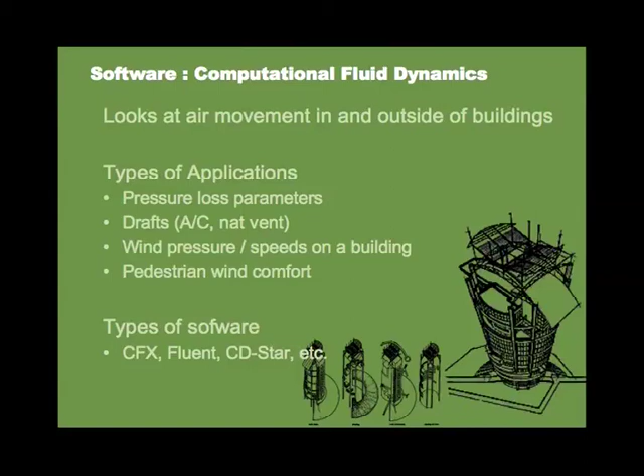It was really interesting for the guy doing it because he was learning a new skill, obviously. But if it's done in a commercial environment, not a research environment, then there are always time and cost limitations. And because it's such a specialist area, it's better to give it to the specialist that can actually do it and does only that. That's just an opinion, not everybody thinks the same.

These are examples of pictures, the two at the top, which you've seen already.

I haven't included any of the work which I've done for copyright reasons, that we've done in my team.

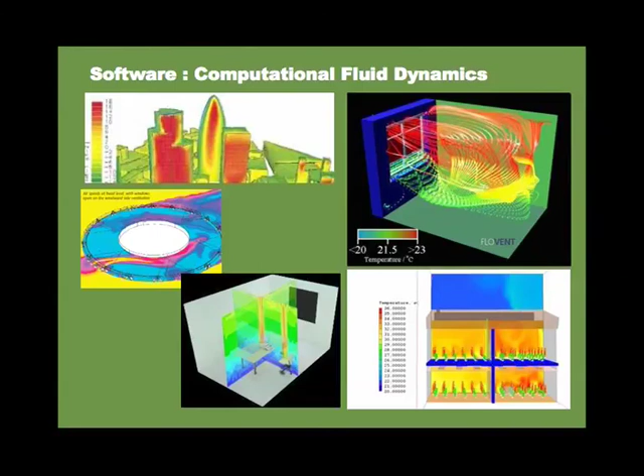These are very useful studies, but very different to dynamic thermal simulation, which I was talking about earlier, because this only takes one single time - it just looks at one moment. The problem is that very often you need to look at many times, so you need to run loads and loads of these simulations to understand what's going on.

So this is the kind of output that comes out of this software. It's quite useful. Here we have wind speeds - these are not temperatures, these are wind speeds.

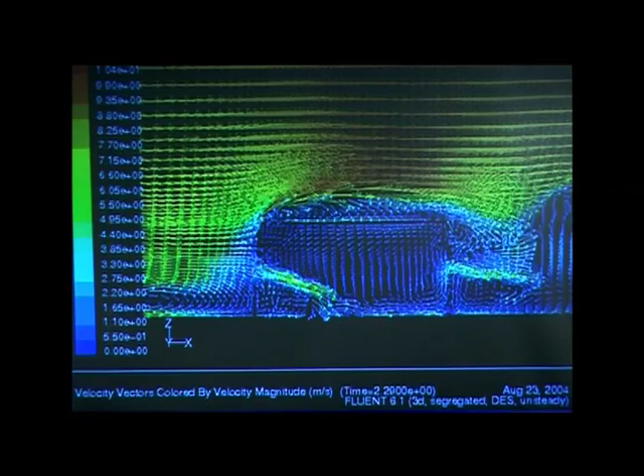You can see the effect I was talking about earlier, that the wind is higher at the top than at the bottom. It's quite obvious. Then you can see the air coming inside, and maybe there's a bit of a draft here. It's useful for understanding drafts.

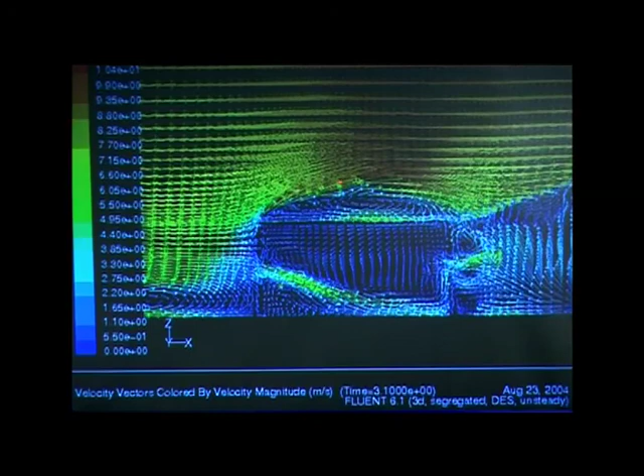And if you want to put a wind turbine on a building, you can see that the plume comes at this point, so maybe you want your wind turbine to be higher than that.

So it's very useful work, but extremely time-consuming - it's about the most time-consuming type of simulation exercise that I've come across.

The health warning I have for this software: training is indispensable. I can't stress it enough. I've been trained - trained for days and days on this software - and I still can't do it.

And this is not just about the training itself - it's about the training and the learning phase after that, which takes months and months. So the review is even more important.

The problem with reviewing CFD is that it's difficult to find reviewers who understand CFD as well as the people doing the simulation. So that's another reason why I'd often prefer subcontracting something like that - it's safer.

Steady state simulation only captures one particular point in time. It's very specialist, and there are problems of accuracy - the software packages perform very differently in terms of accuracy.